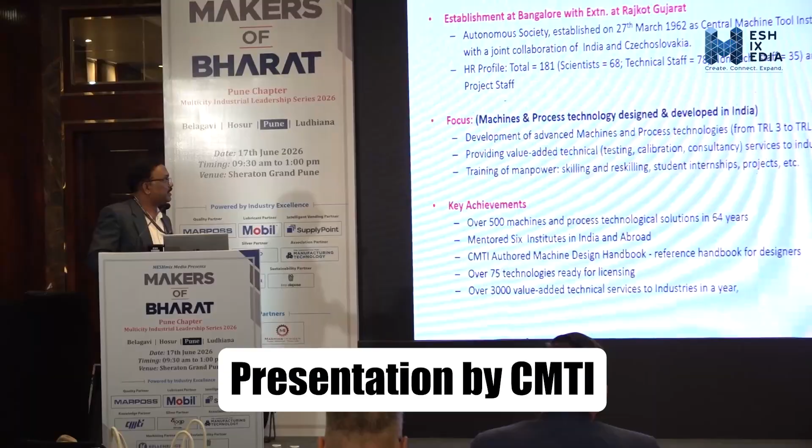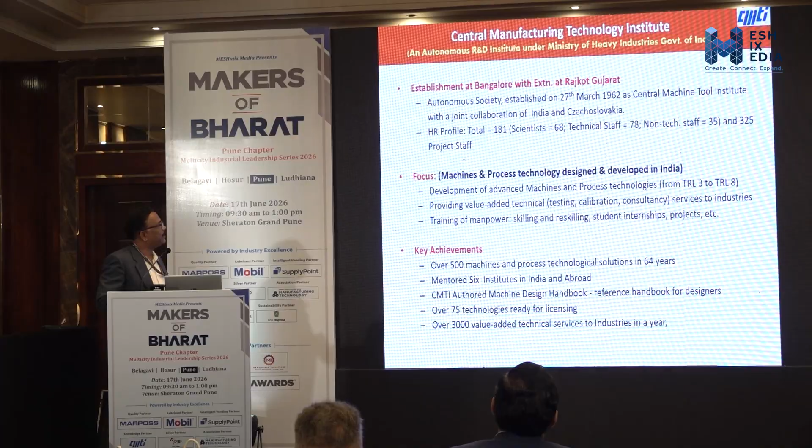CMTI was established on 27th March 1962 as the Central Machine Tool Institute. It was later renamed, after February '92 I think, to Central Manufacturing Technology Institute, with the joint collaboration of India and Czechoslovakia during 1962.

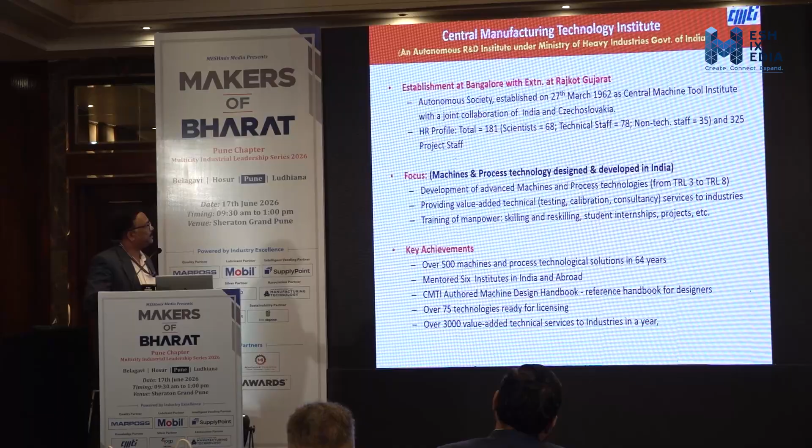Our profile strength is a total of 181 staff. Out of that, scientists are 68, technical staff 78, non-technical staff 35, and 325 project staff working with us.

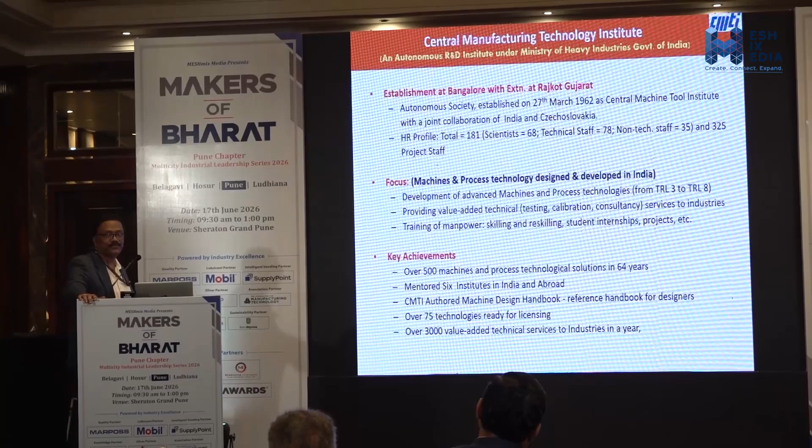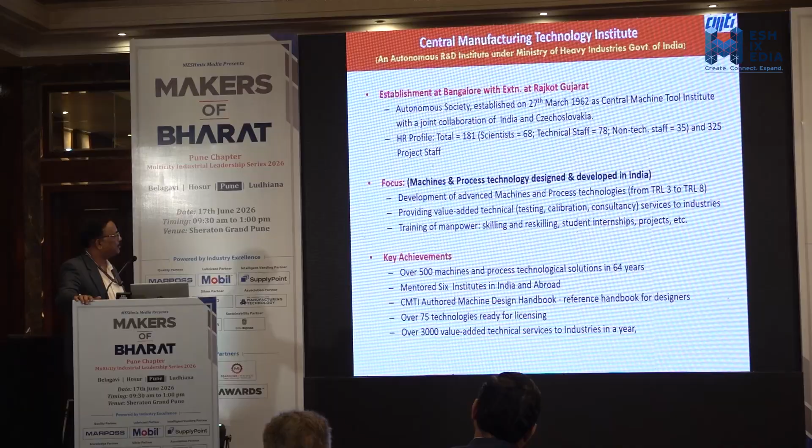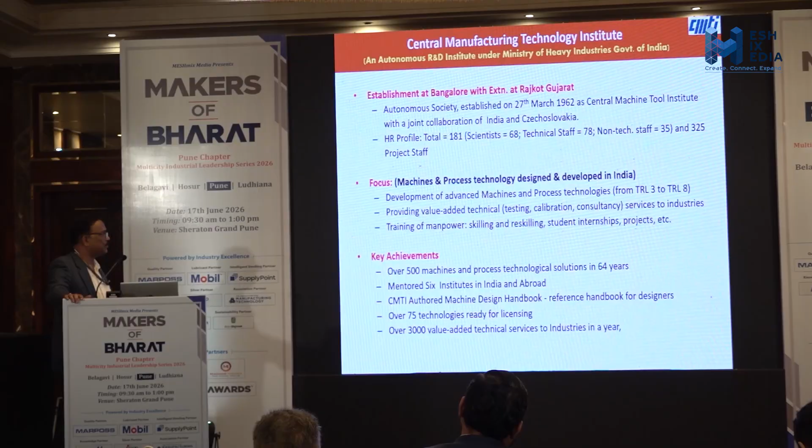Our main focus area is development of advanced machines and process technologies from TRL level 3 to TRL level 8, and providing value-added technical testing, calibration, consultancy services to industries, and training of manpower, skilling and reskilling of students, internships and projects.

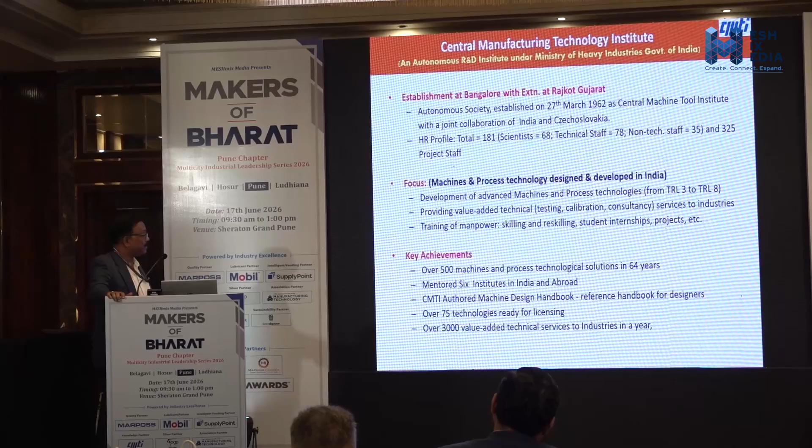Our key achievements include more than 500 machines and process technologies developed over 64 years, mentoring 6 institutes in India and abroad. CMTI authored the Machine Design Handbook as a reference handbook for mechanical engineer designers. We have 75 technologies ready for licensing, and provide over 3,000 value-added technical services to industry every year.

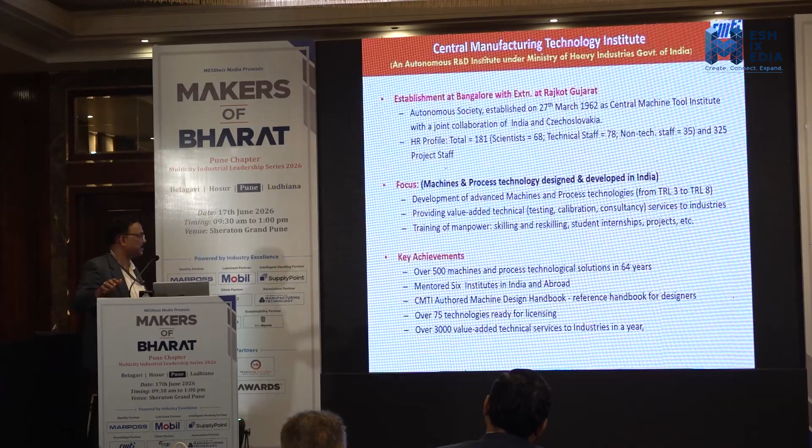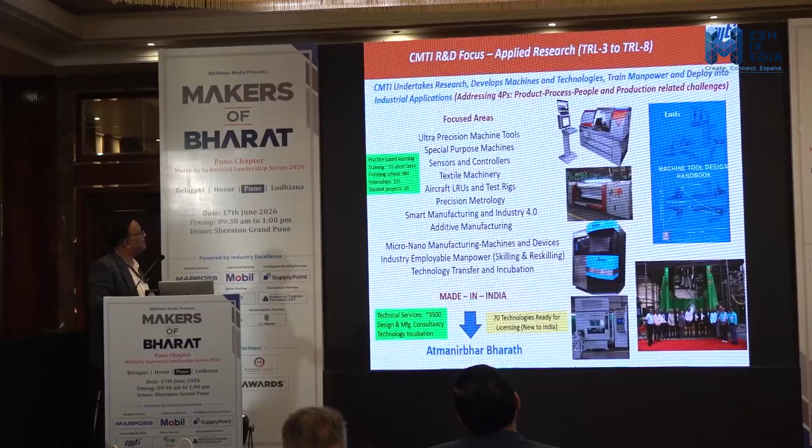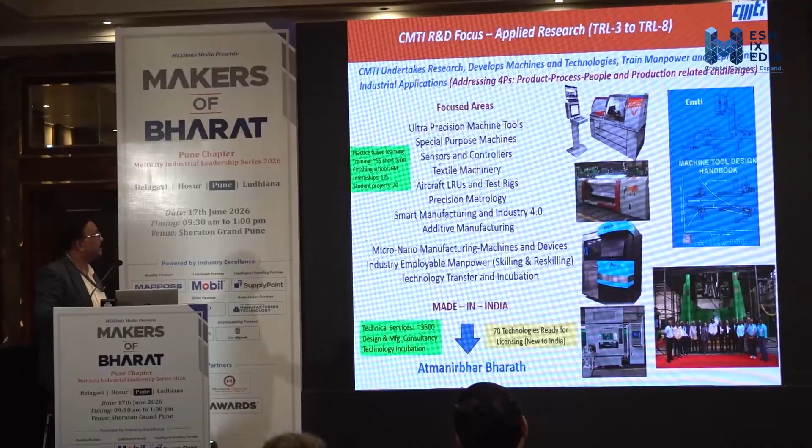These are the technologies we have acquired over the years. Our main focus areas are ultra precision machine tools, special purpose machine tools, sensors and controllers, textile machinery, aircraft LRUs and test rigs, precision metrology, smart manufacturing, Industry 4.0, additive manufacturing, micro nano manufacturing machines and devices, and industry employable manpower skilling and reskilling.

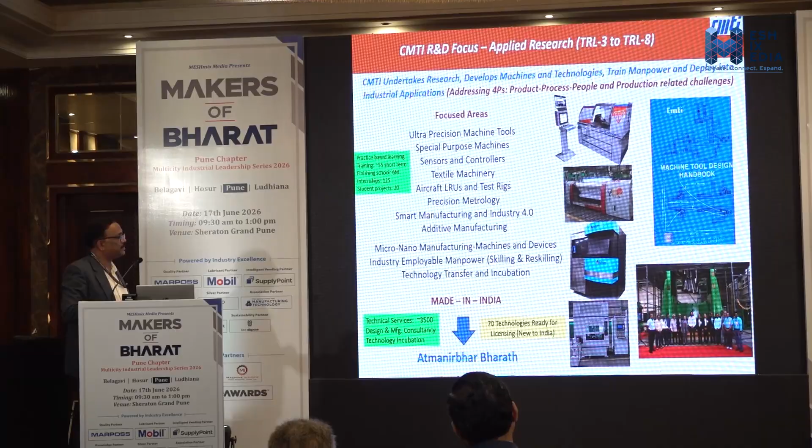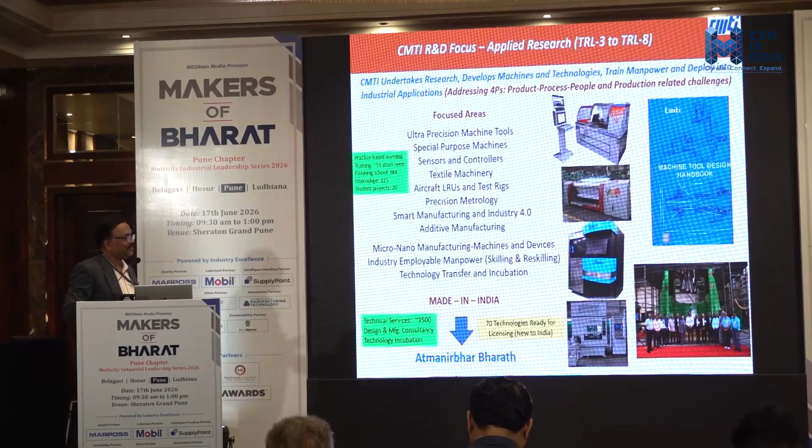On the right side, what you are seeing is the machine tool design handbook. You can say it is a Bible or a Gita, whatever. These are the machines we have developed so far.

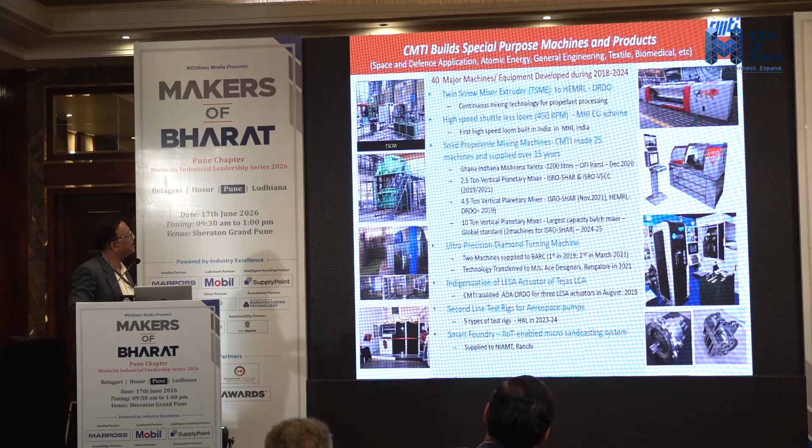We have developed one twin screw mixer extruder. This technology is not available in India.

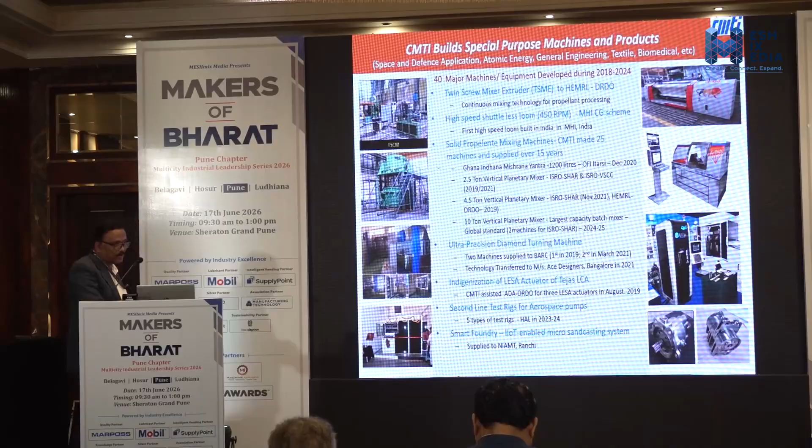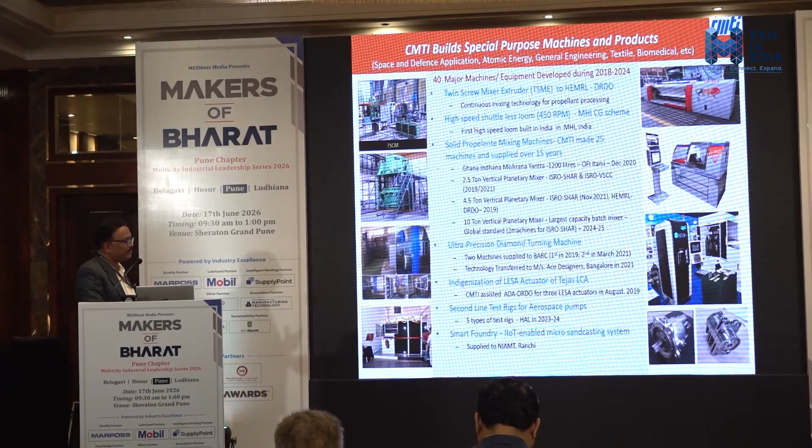We developed it from scratch, and it is supplied to one of the DRDO labs. Actually, we are machine tool developers, but we don't have any idea about the loom textile field.

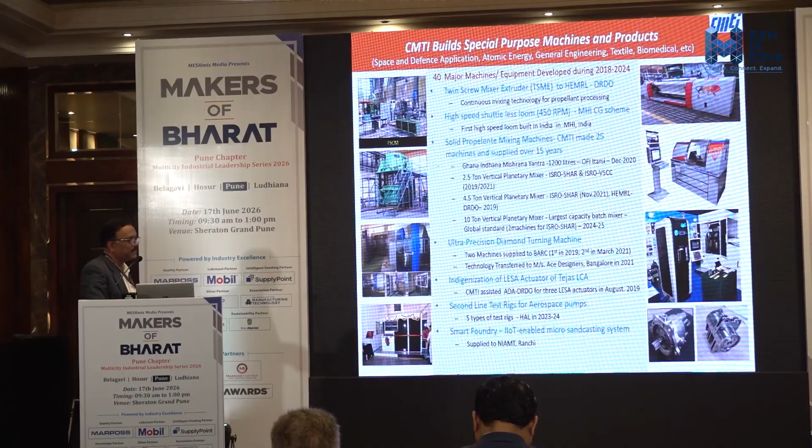So we have developed one high-speed shuttleless loom with 450 RPM capacity with the help of Ministry of Heavy Industry under the Capital Goods Scheme. This is the first high-speed loom built in India with the help of MHI.

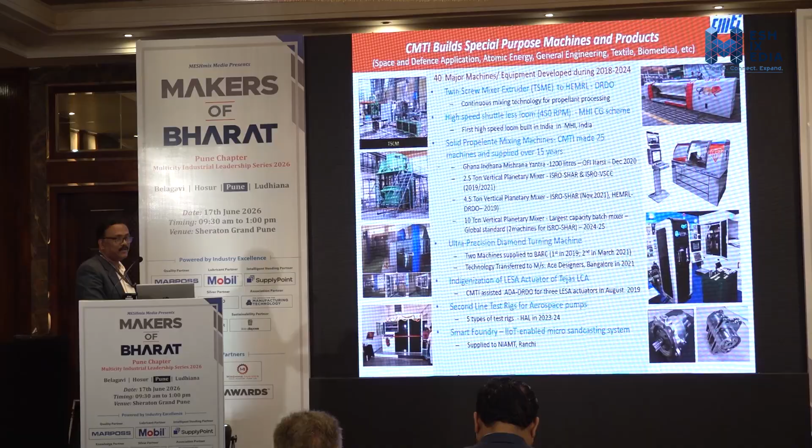Now we are developing a 550 RPM next version, an upgraded version. We have also developed solid propellant mixing machines, and supplied almost 28 to 30 mixers across India, for example to DRDO labs and ISRO.

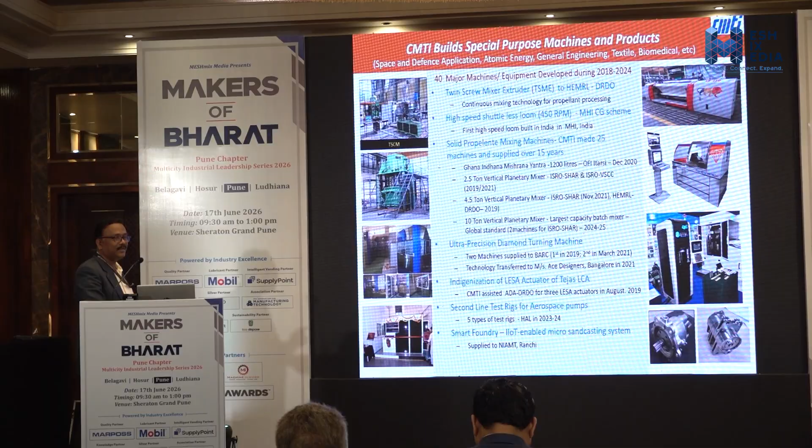One of the biggest machines we supplied is a 10-ton capacity mixer. Our customer took a quote from an imported agency, who quoted almost 140 crore per machine mixer. But we developed it in-house for 50 lakhs per machine.

So that is what we have achieved.

Under ultra precision diamond turning machines, we have developed 2 machines and supplied them to BARC. We have also transferred the technology to Ace Designers, one of the biggest machine tool manufacturers in India.

We also worked on indigenization of the LESA actuator of Tejas LCA for ADA, and second line testing for aerospace pumps. The pump and actuators we developed in-house, and that technology has also been given to ADA for further manufacturing.

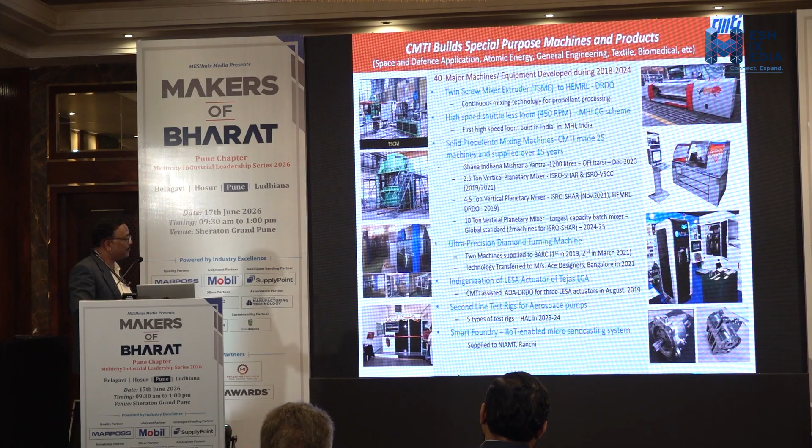We have developed one smart foundry, IIoT enabled technology. These are images from a handing over ceremony with the ISRO chairman, and some cutting and edge preparation machines supplied to BARC.

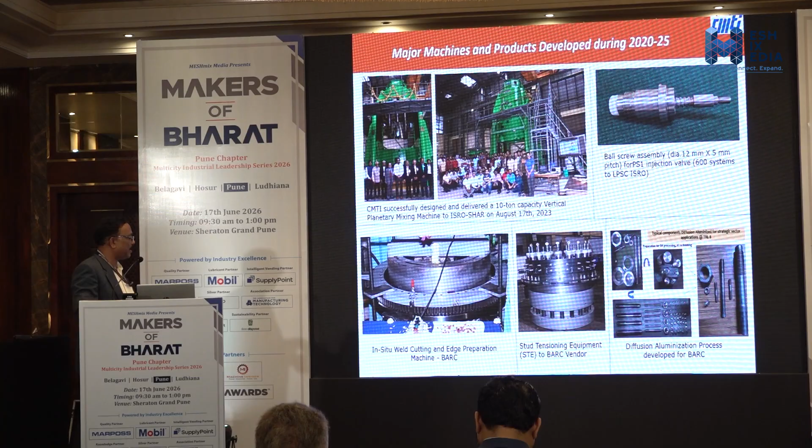Diffusion aluminization technology was also developed for BARC only. These are the mixers we have supplied to various agencies.

Even in loom technology, we had to compete with neighboring countries like China. Our building cost was too high, so we had to reduce the cost to compete with our neighboring country.

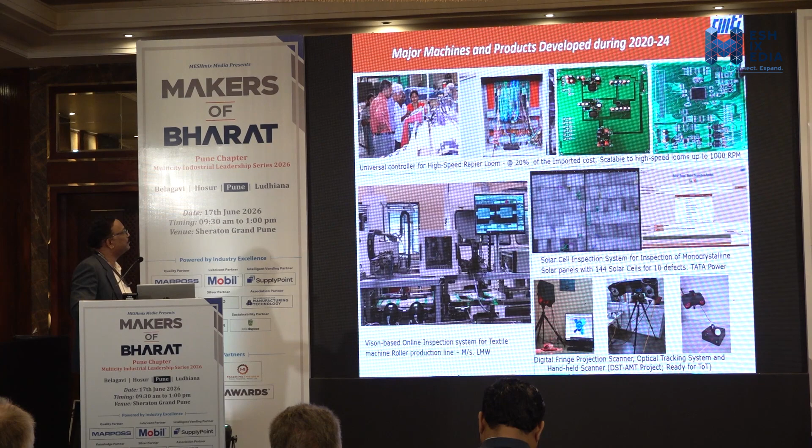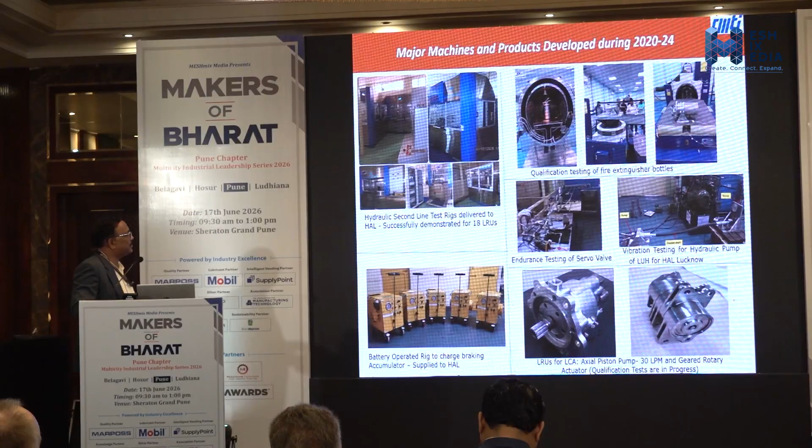These are all products developed in-house for the first time in India, and solutions we have supplied to our customers.

And one more project, though it is not our usual activity, we have developed a device for monitoring cattle lameness to prevent involuntary culling of cows.

We have supplied this to NDRI in Bangalore, the National Dairy Research Institute. This solution has already been supplied to them.

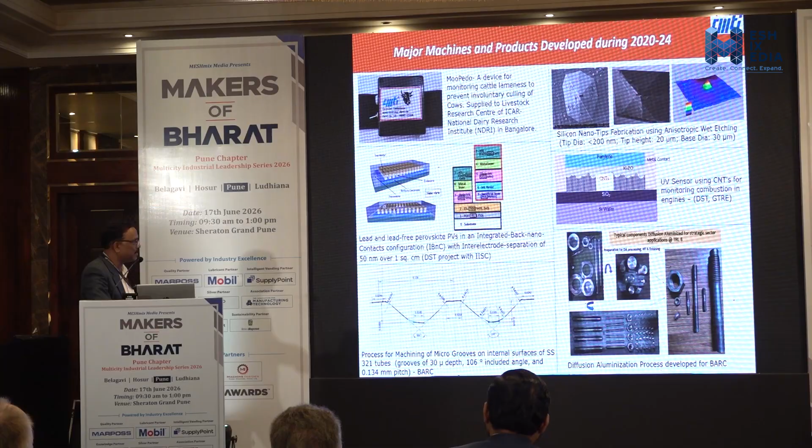So these are some glimpses. We have supplied some more machines. So I wanted to go further fast.

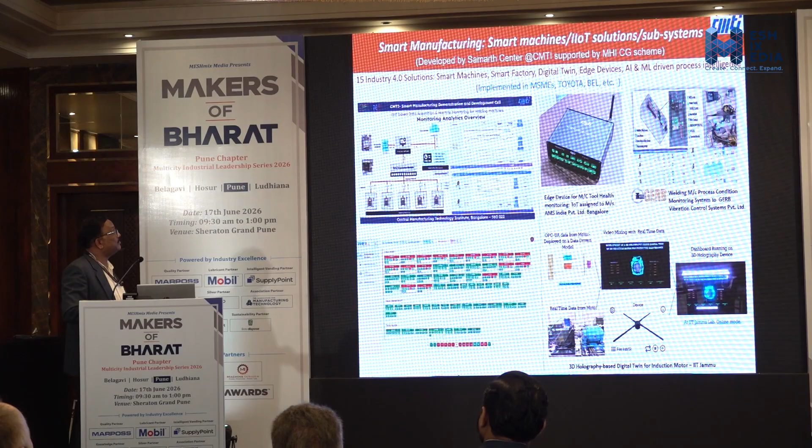And remaining half day we conduct on-job training courses. So these are, under MHI scheme, we have developed so many solutions and supplied to the customers.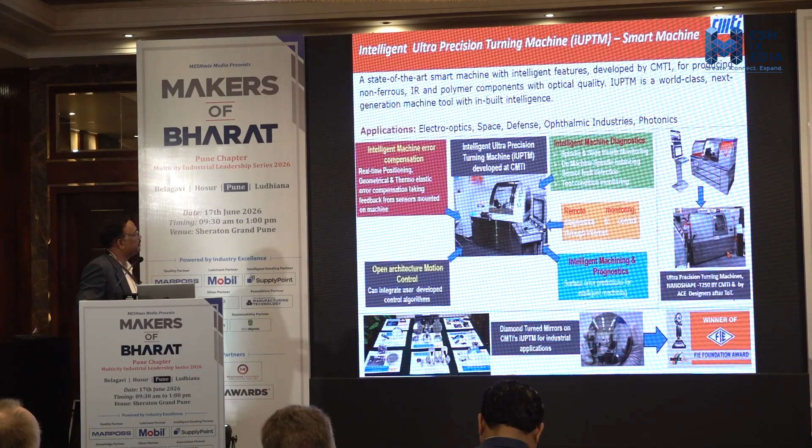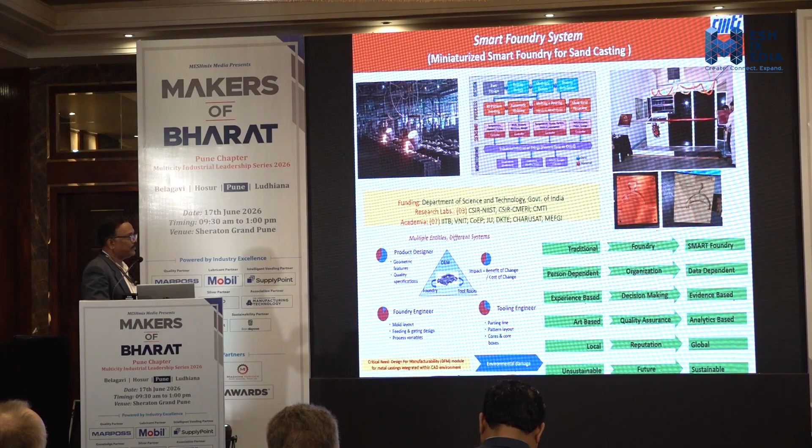And this smart foundry - left side what you are seeing is a typical foundry environment that has been converted into smart. So now we have developed, bar only 2 kg foundry capacity, but if you want further requirement, we will develop and supply.

So under the capital MHI capital goods scheme, we have developed almost 16 technologies with 13 industry partners. So for example, these - okay, next will come.

AOI 3D imaging defect finding in printed PCB boards, and BLDC wire mid-drive motor winding machines also we have developed with some technology partners.

And smart tool holder also we have developed. Anybody interested, you can come and discuss with us. We will provide solutions for them and transfer the technology.

Some of the LRUs and the industrial leak tester panel also we have developed under this scheme. And we have transferred a few technologies.

For example, in India, all ball screws and LM guideways are imported. More or less all are imported. All the machine tool manufacturers import the ball screw and LM guideway technology. But we have developed the technology and transferred this technology to Jyoti Machine Tool, CNC Machine Tools, Rajkot.

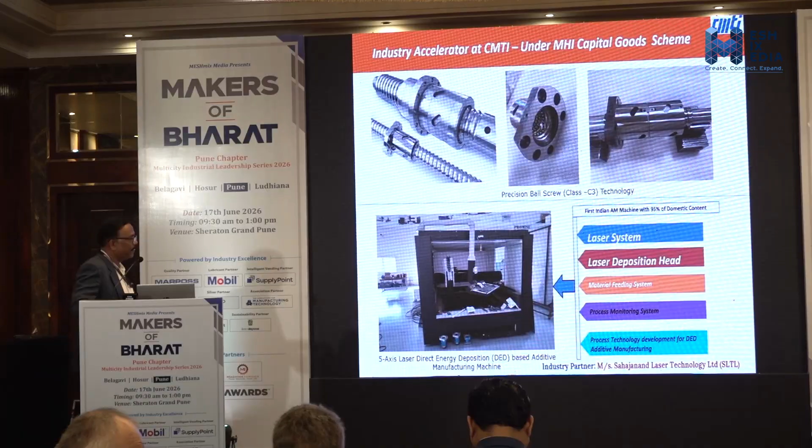And Sukshma 3D printer also - that is not a metal-based, it is a polymer-based technology we have developed in-house.

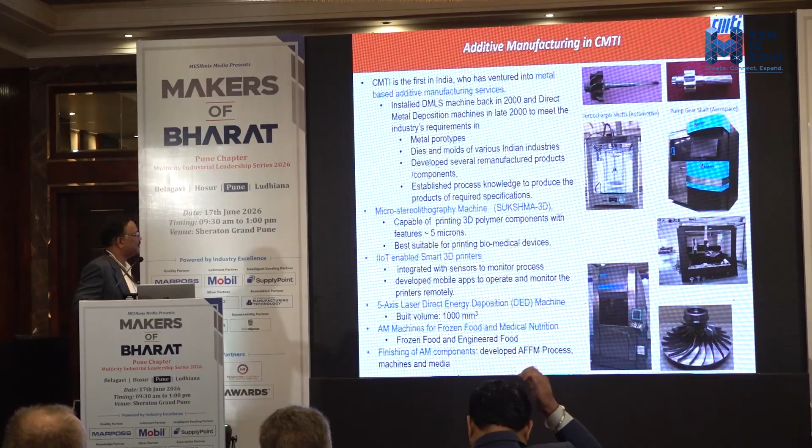And we are going to start a battery manufacturing production line also, because now present day battery manufacturing production line is very, very important, and government is also providing funding to establish this technology. So we are looking for technology partners to bring it further ahead.

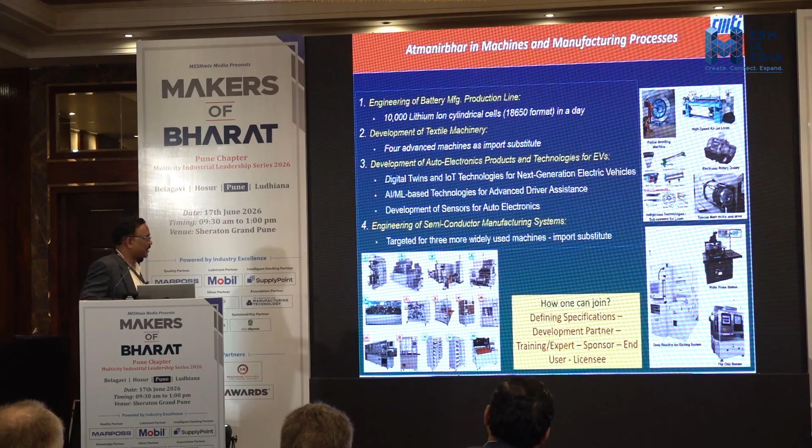And these are all future technology. So we wanted to develop indigenous CNC and drive motors. It is called Bharat CNC controller and feedback devices. And we are asking for funds from our ministry.

And in India, most of the machine tool manufacturers give accuracy of 10 micron and above. Below 10 micron, no manufacturers are there to build any such machines. So we wanted to develop in India, below 5 micron machines we wanted to build, for example 3 special purpose machines and 8 precision and micro machines.

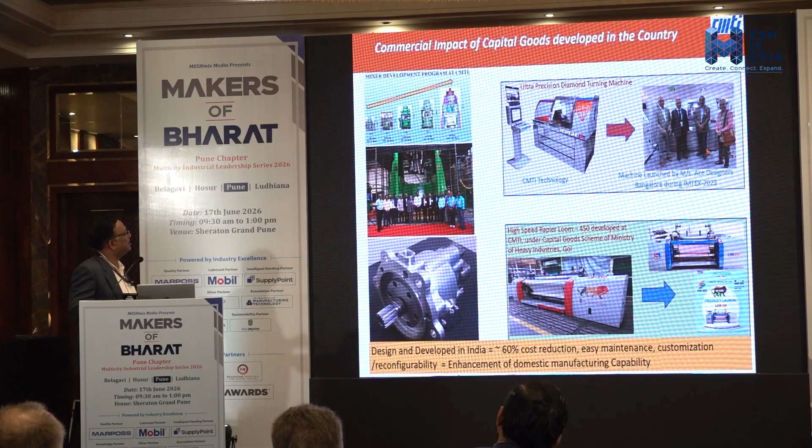We have identified, and 3 smart machines also we have identified under this development of advanced manufacturing equipment. So, repeated - so whatever I had told is 1 meter cube DED machine development.

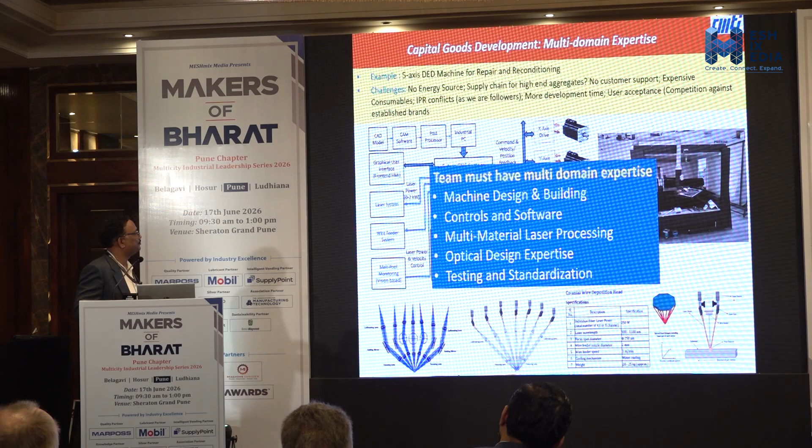These are all our achievements. These are challenges, recommendations.

So we are into, even we have taken some projects for agri and food processing technologies. So medical nutrition - it is mainly useful for patients, those who don't have to take much food. So for proper nutrition and all, our central CFTRI will give nutrition kind of inputs, and CMTI will build the machine for the 3D food printer.

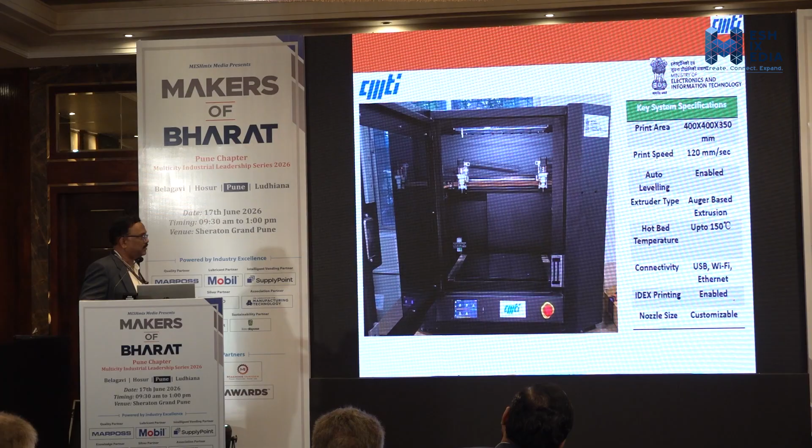This is what we have developed and supplied to CDAC Kolkata.

Any type and shape you can achieve. This is the salient feature of the food printer.

Any requirement, please contact. Thank you.